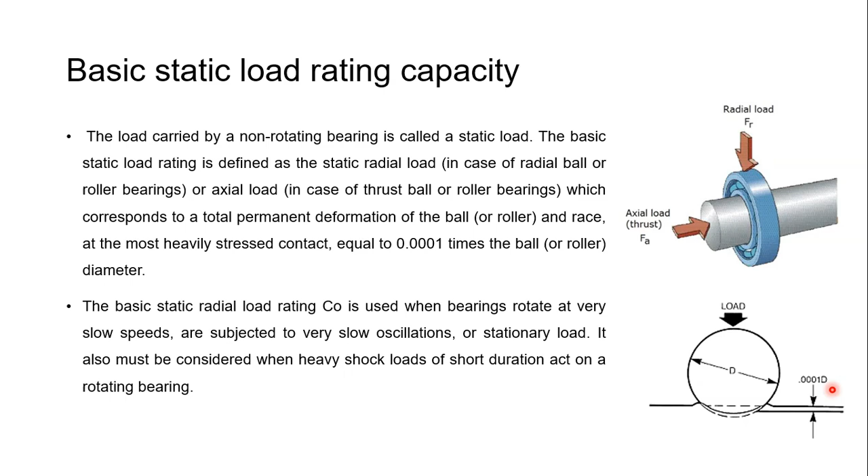So the value of C0, or the equation for basic static load capacity, is derived using Stribeck's equation. So we will derive the equation given by Stribeck.

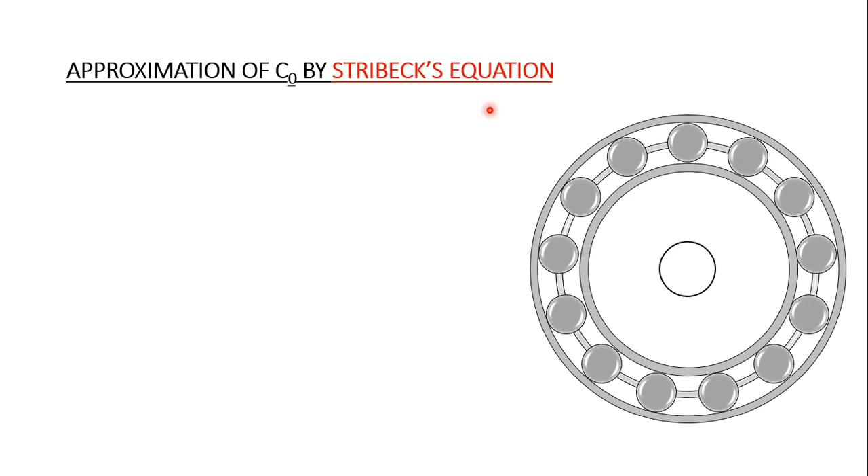So in deriving the equation there are several assumptions. First, the races are rigid and retain their shape.

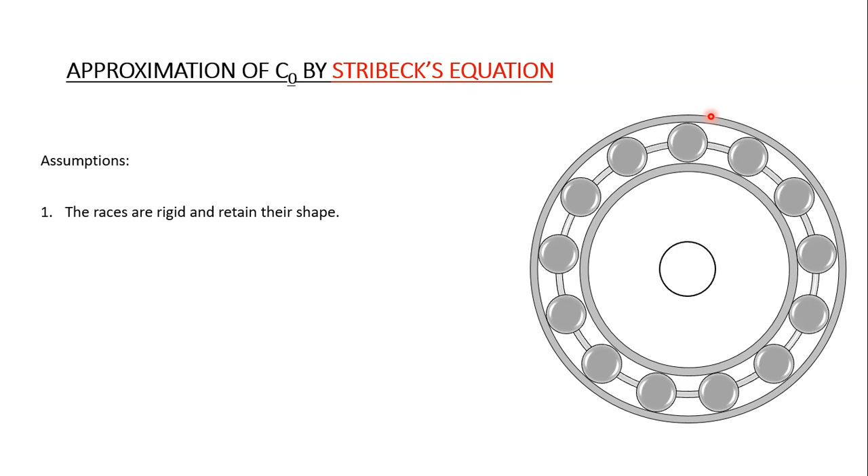This inner race and outer race, they are rigid bodies. Now rigid body means they cannot deform. So the outer race and inner race, they are rigid bodies.

So the remaining element, the balls, they will be deformed, because inner and outer races are rigid.

Next, the balls are evenly spaced around the periphery of the inner race.

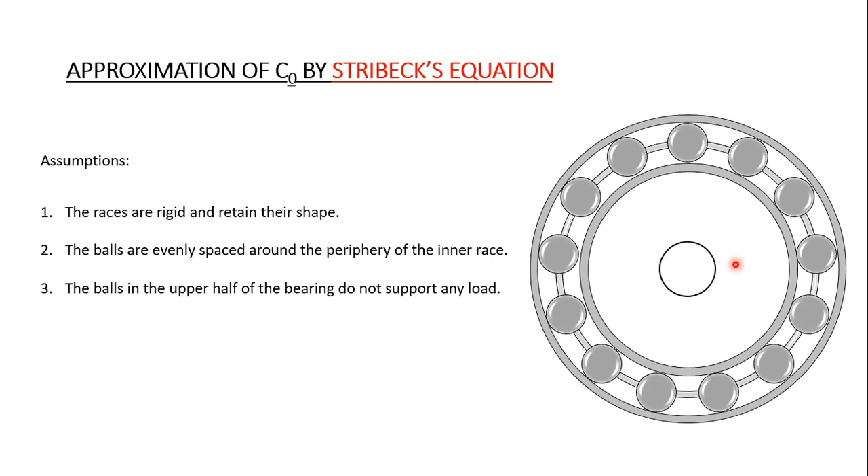Third, the balls in the upper half of the bearing do not support any load. Means the upper half of the bearing, the balls above that half, they do not support any load.

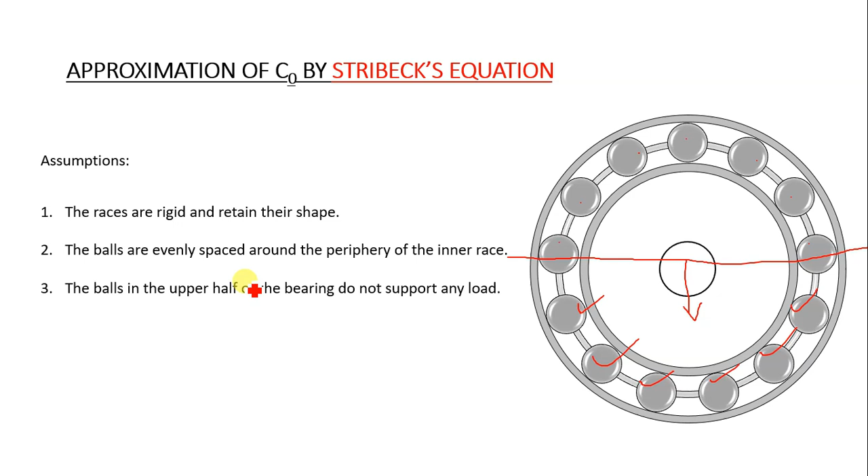So the bearings below the half, below the bearing center, they will support the load. So that is the third assumption.

So let's consider half portion of the bearing, or half of the balls in the bearing. These are the axes passing through the center of this ball and center of the bearing.

All these axes pass from the center of the ball and the center of this bearing, and these balls are evenly spaced, so there will be equal space between all the balls, and they will be distributed with equal angles.

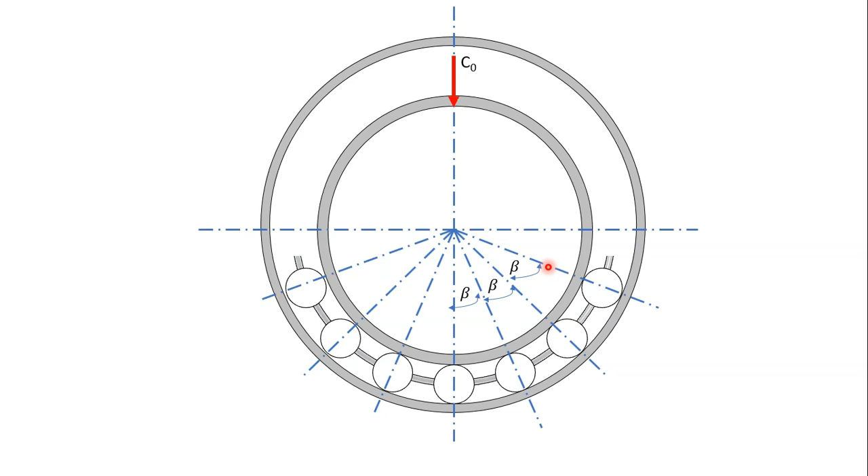C0 is the static load acting on the bearing.

P1, P2, P3, these are the loads acting on each and every ball. So the C0 amount of static load I apply on the bearing, then this ball will support P1 amount of load, this ball will support P2 amount of load, this ball P3, and so on.

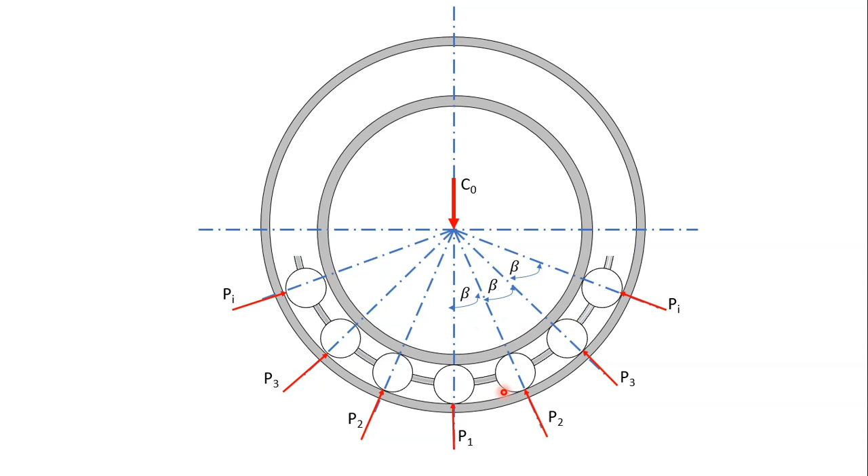So if we want to find C0 from this figure, then what should we do? We'll simply do summation of forces in the vertical direction equal to 0.

So C0 is in the downward direction, so C0 will be equal to P1 plus the vertical component of P2, which we need to consider, that is P2 cos beta.

Now here is also P2, this is P2 cos beta, and the same load P2 is also on the opposite direction, so it will be 2 times.

Plus we need to consider the vertical component of this force P3, so P3 cos of... now which angle should we take?

We will consider 2 beta, beta plus beta, that is 2 beta, because we are considering the vertical component. So the angle between the vertical and the axis of P3 needs to be considered, that is 2 beta. This is again a replica on this side, so it will be multiplied by 2, and so on. So whatever bearings are there, we need to sum up the load each one takes. This is how we will find the value of C0.

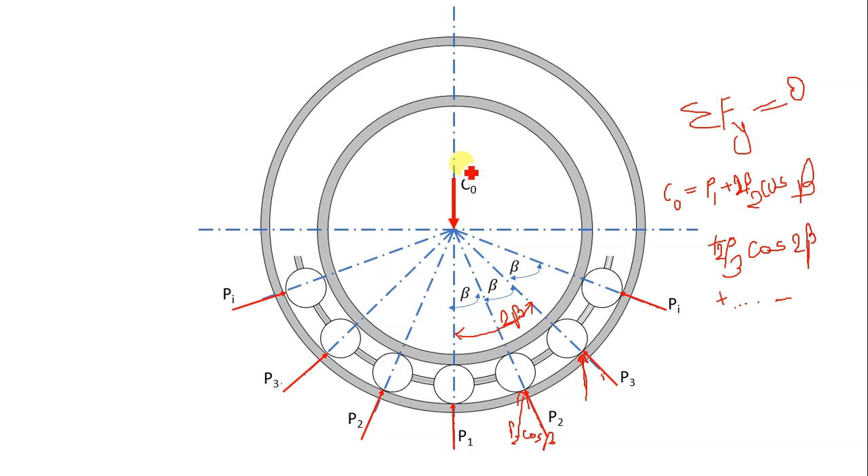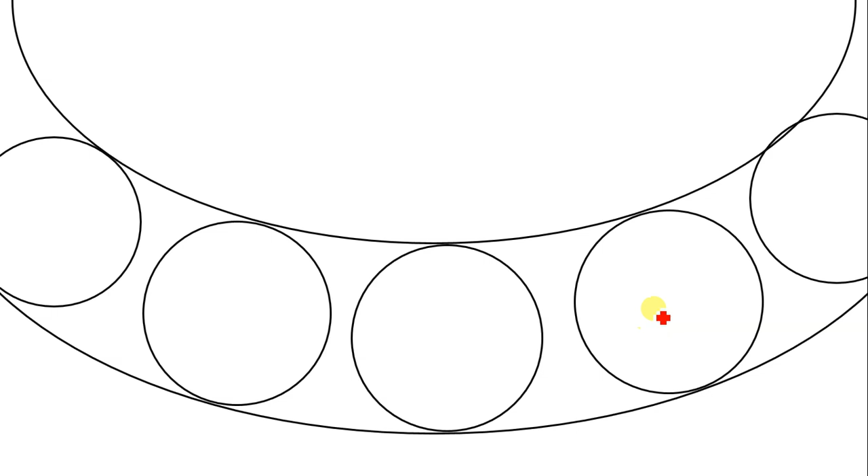For simplicity I have shown the inner race as a simple line because we know it is a rigid body. Now we will consider a zoomed portion of this much amount. If we zoom this portion, it will look like this. This is the inner race, this is the outer race, and these are the balls.

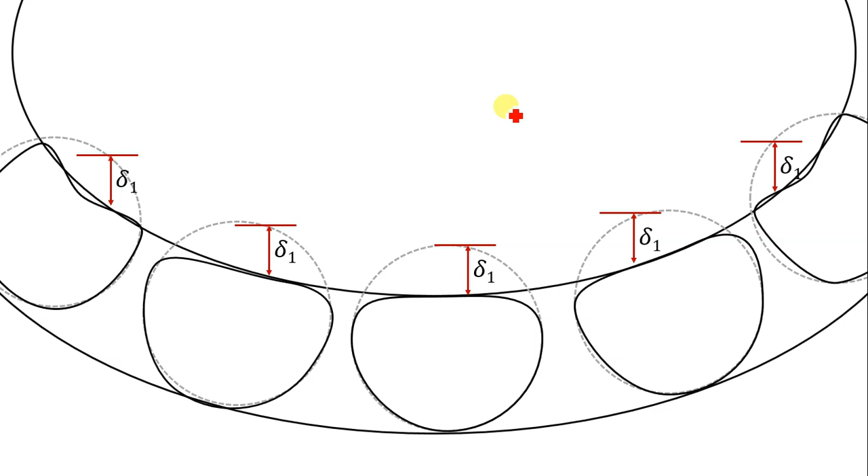We know that when load comes on the inner race, the inner race will be displaced, not deflected, displaced. You can see the inner race is displacing by amount delta 1 in the vertical direction. And we know that this inner race is a rigid body, so whatever points are on the inner race, any point on the inner race will be displaced by the same amount in the vertical direction.

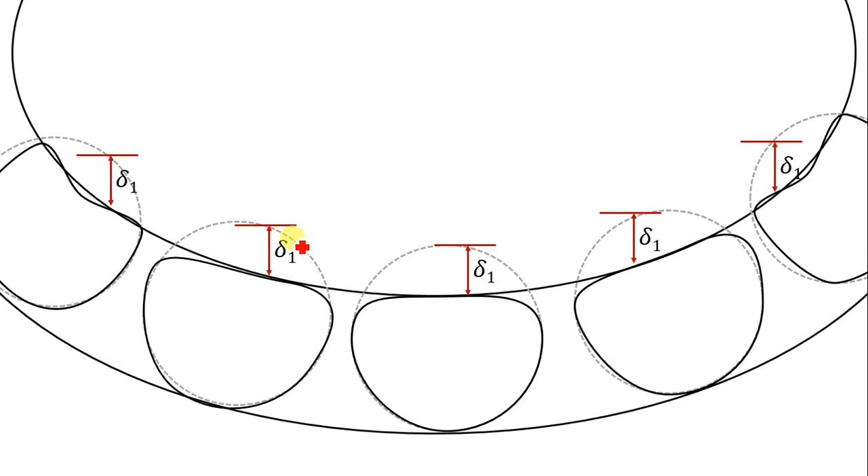If we consider the deflection of balls in the direction of its axis, then for this first ball at the center, what will its deflection be? It will be delta 1 itself, in the direction of its axis.

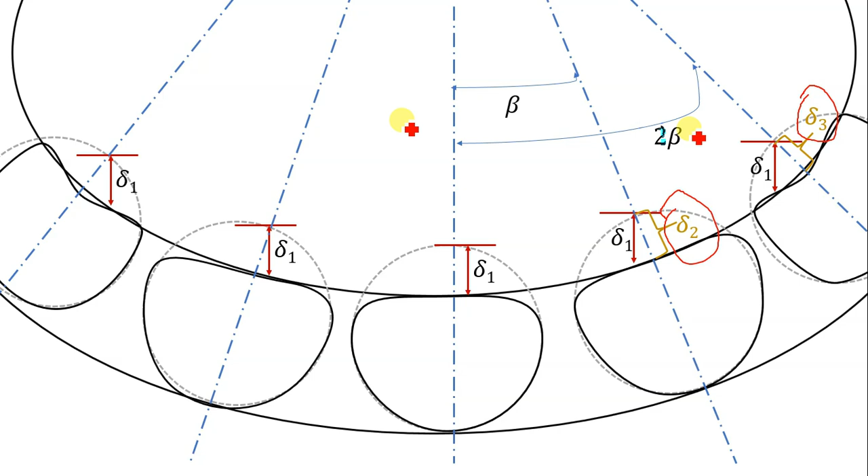So now we will derive the equation by making a relation between these deflections.

So in the presentation we have seen that these balls are deformed by the deflection of the inner race by the amount delta 1. Now as we have assumed that this inner race is a rigid body, all the points on the inner race will be displaced by the same amount in the vertical direction, that is delta 1 for every ball.

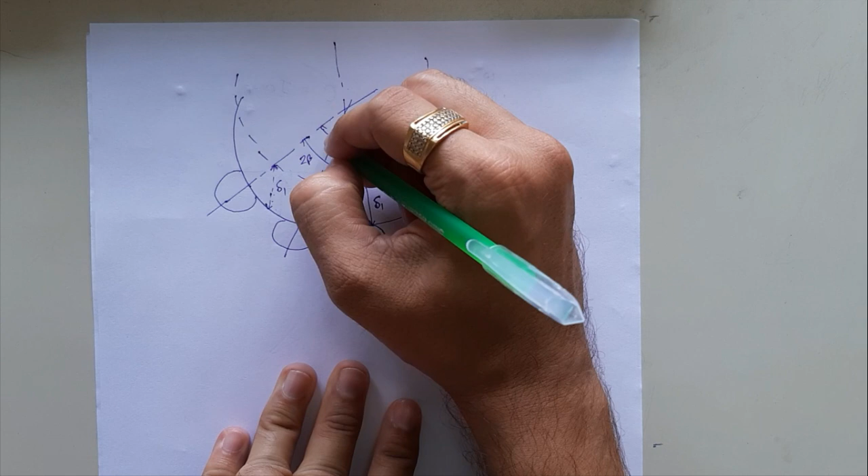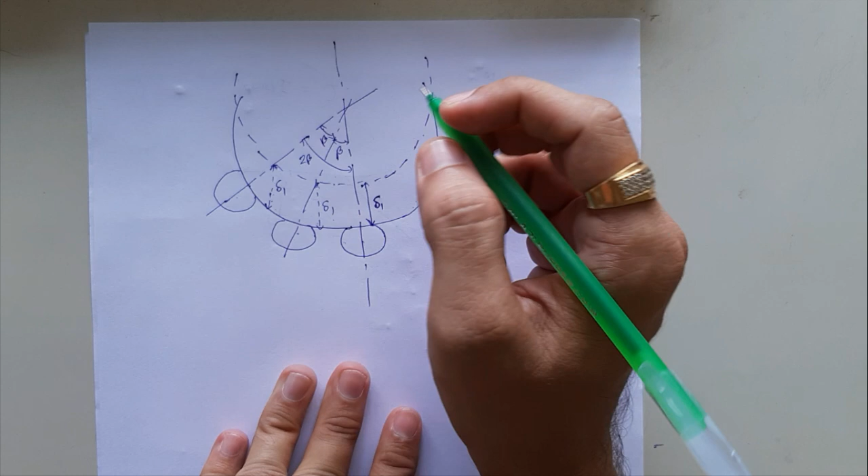This angle between two balls is beta. So the angle between this ball and this ball is beta. The angle between this ball and this ball will be beta plus beta, that is twice beta. Now as all balls move down by the same distance delta 1, and we know the angle between this vertical and the axis of this ball is beta, this is 2 beta, so the actual deformation of this ball will be delta 2, and the actual deformation of this ball in the direction of its axis is delta 3.

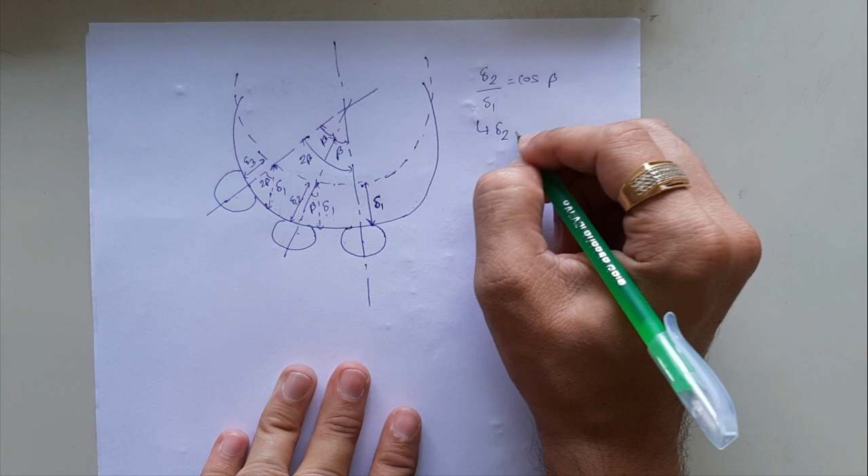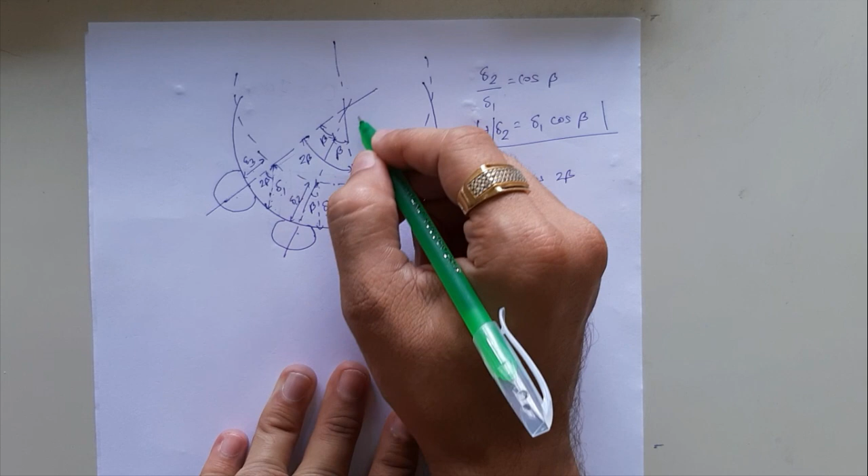If we find the relation between delta 2 and delta 1, then delta 2 by delta 1 is equal to cos beta. So we can write delta 2 is equal to delta 1 times cos beta. Similarly we can write the relation between delta 3 and delta 1: delta 3 by delta 1 is equal to cos 2 beta, because the angle between this vertical and this axis is 2 times beta. This angle of this axis is twice beta, so this angle will be 2 beta. So we can write delta 3 is equal to delta 1 times cos 2 beta.

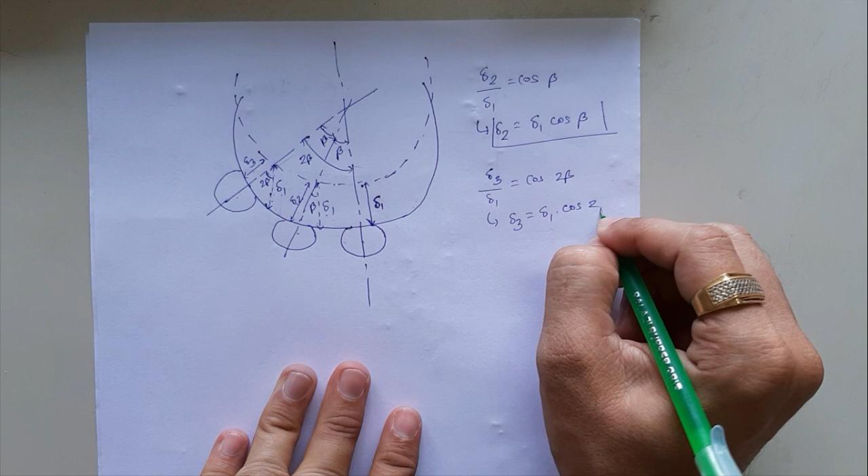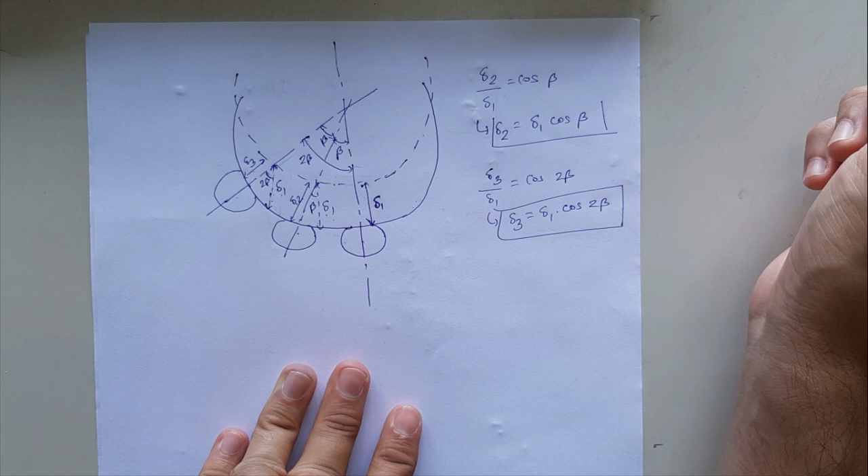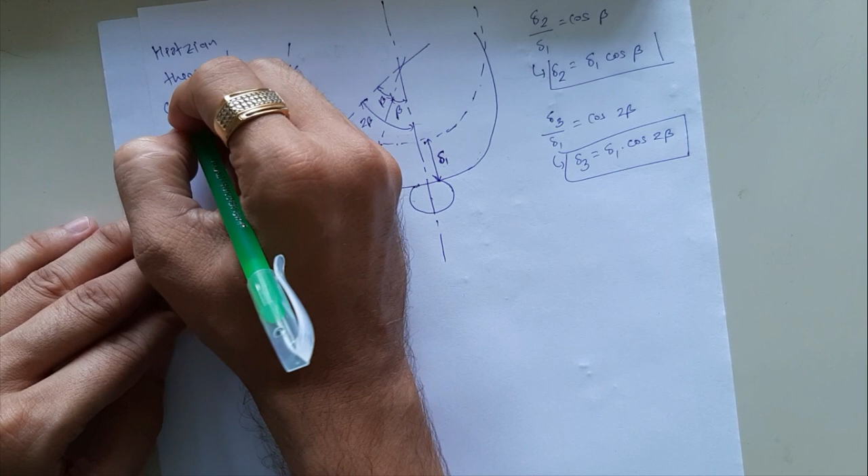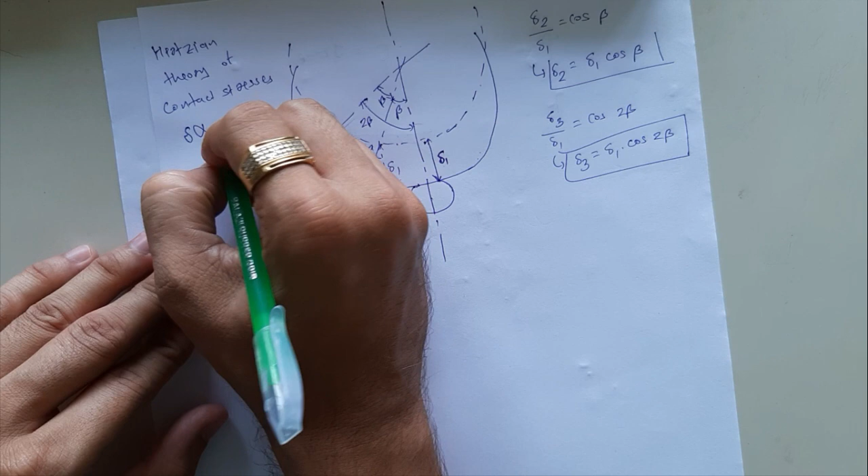Now, as per Hertz contact stress theory, if we find the relation between deflection of the ball and the load acting on that ball, then according to the Hertzian theory of contact stress, we find that deflection of a ball is proportional to P raised to 2 by 3. This P is the load acting on that ball.

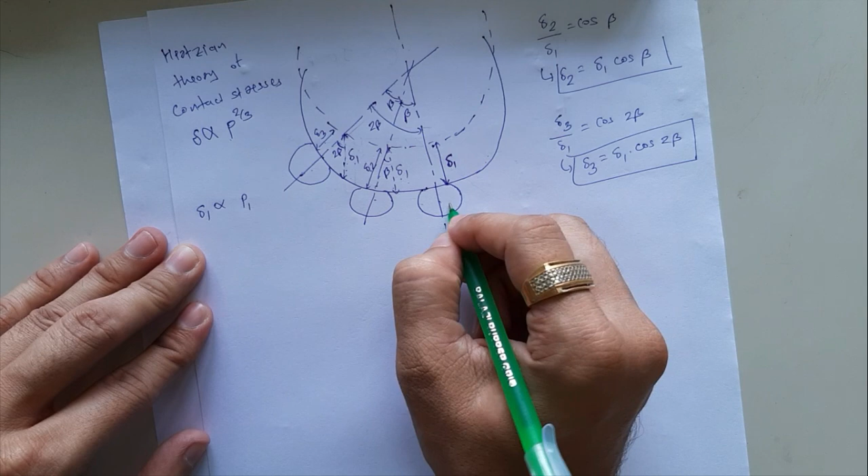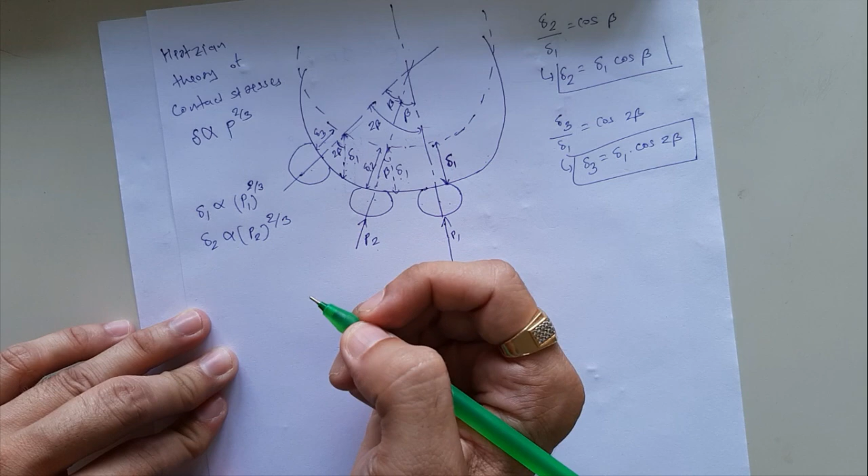So for our case we can write that delta 1 is proportional to the load acting on this first ball, that is P1, so P1 raised to 2 by 3. Delta 2, the deflection of the ball on which the load acting was P2, so delta 2 is proportional to P2 raised to 2 by 3, and similarly delta 3 is proportional to P3 raised to 2 by 3. Here P3 is the load acting.

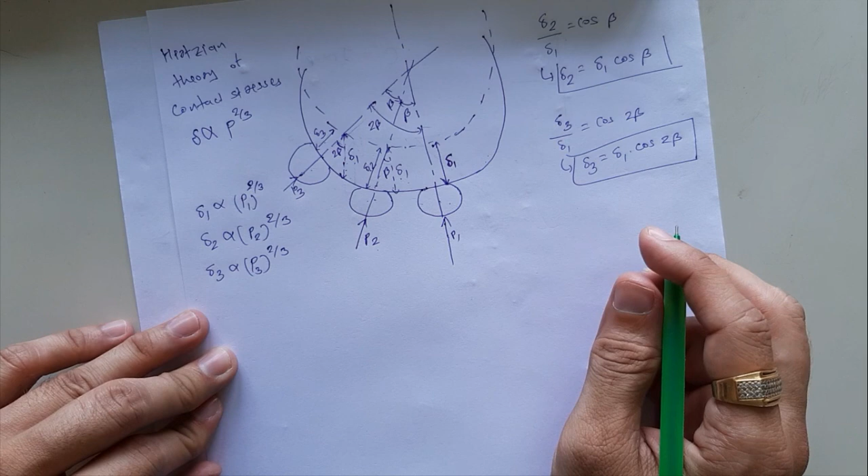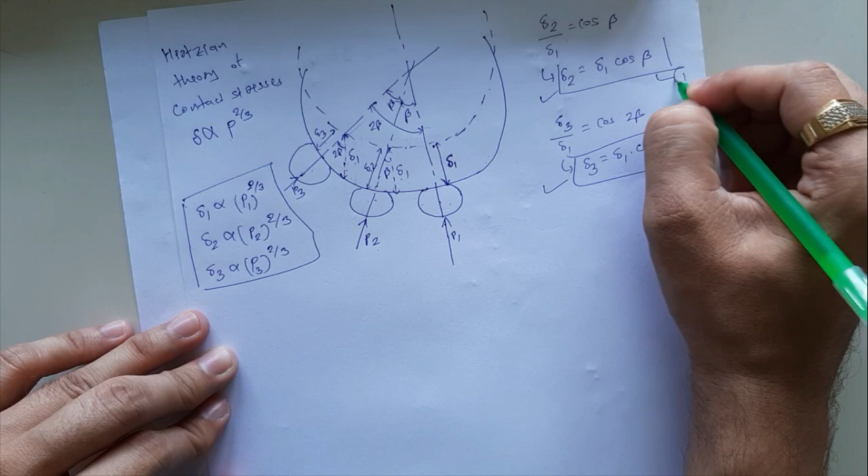Now if we combine these equations with these two equations, let me name these equations 1, 2 and 3. If we combine this equation, we get delta 2 by delta 1 is equal to P2 by P1 raised to 2 by 3, which is equal to cos beta. If we see over here, delta 2 by delta 1 is cos beta. So now if we consider these two terms, we can write that P2 is equal to P1 into cos beta raised to 3 by 2. I'll give this equation number 4.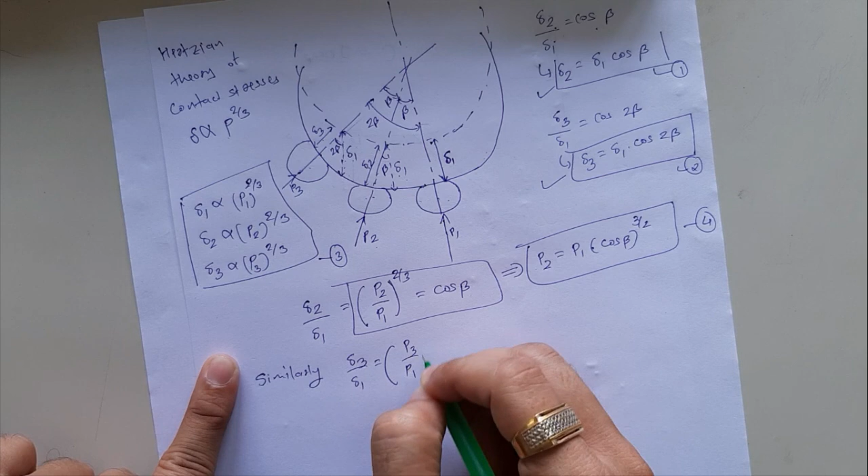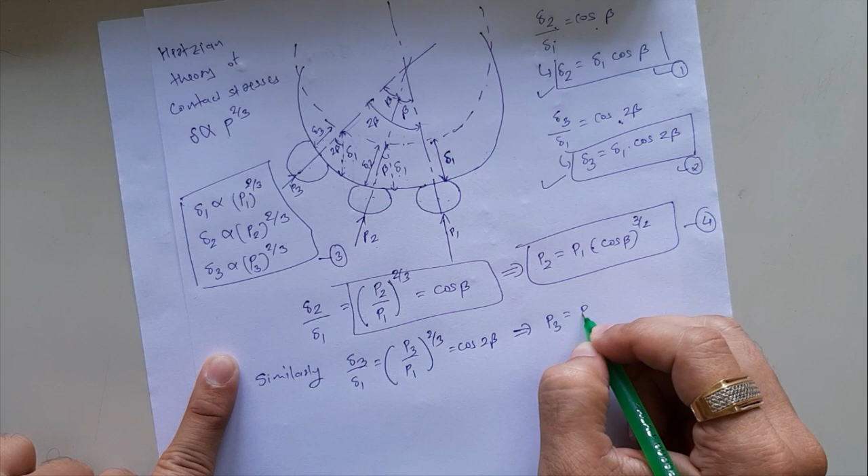Similarly, if we find the relation between delta 3 and delta 1, it comes out that P3 by P1 raised to 2 by 3 is equal to cos 2 beta from this relation. So we can write that P3 is equal to P1 into cos 2 beta raised to 3 by 2. This is equation number 5.

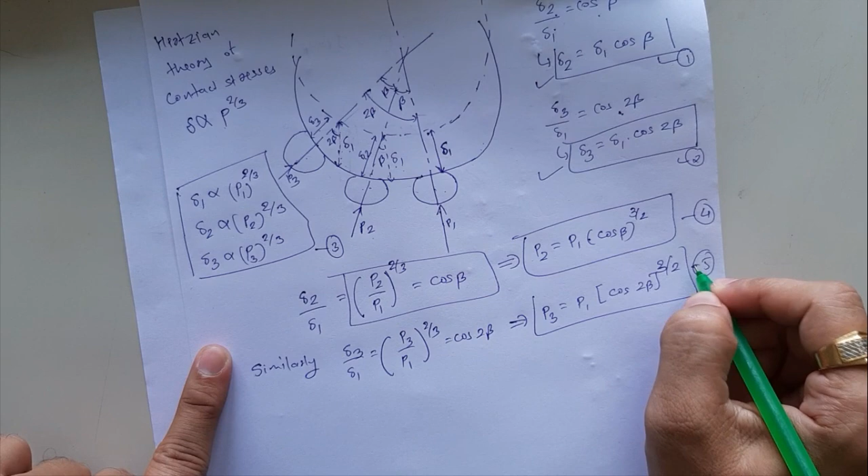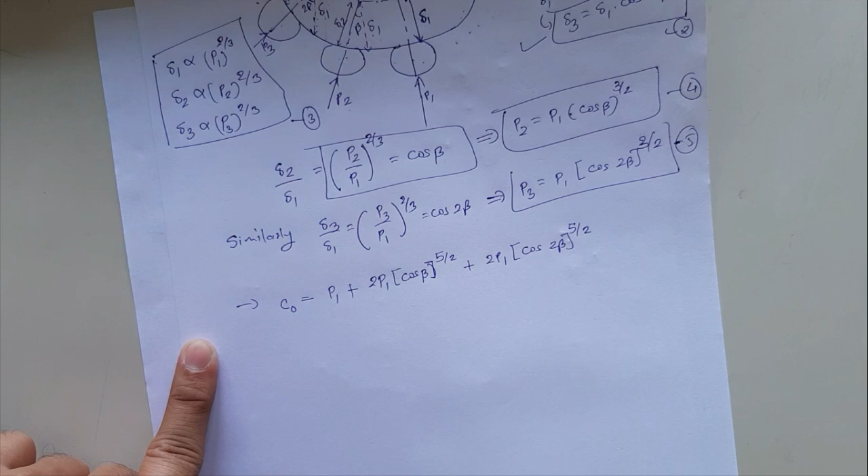If we continue this for the number of balls present, we can write that C0, the static load capacity, is equal to P1 plus 2 times P1 cos beta raised to 5 by 2, plus 2 P1 cos 2 beta raised to 5 by 2, and so on. Taking P1 as common, the inside term is called M. So C0 is equal to P1 into M.

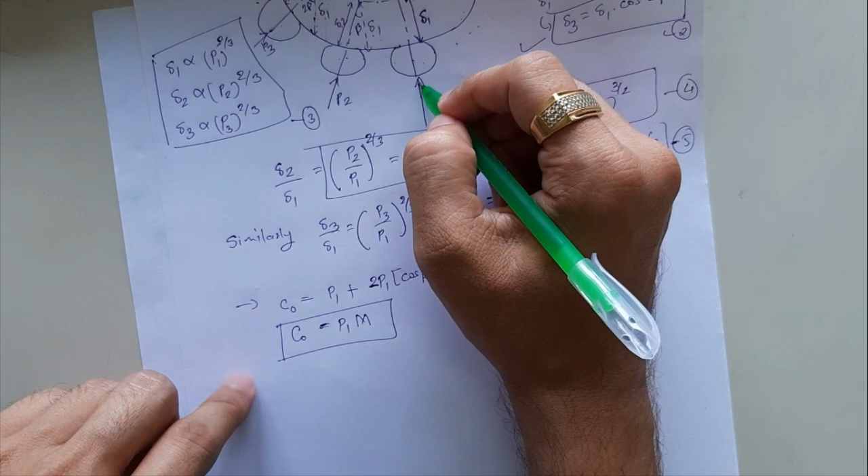Now why have I considered 2 here? Because the balls are symmetric. P1 load is single, then P2 load is present on this side as well as on that side.

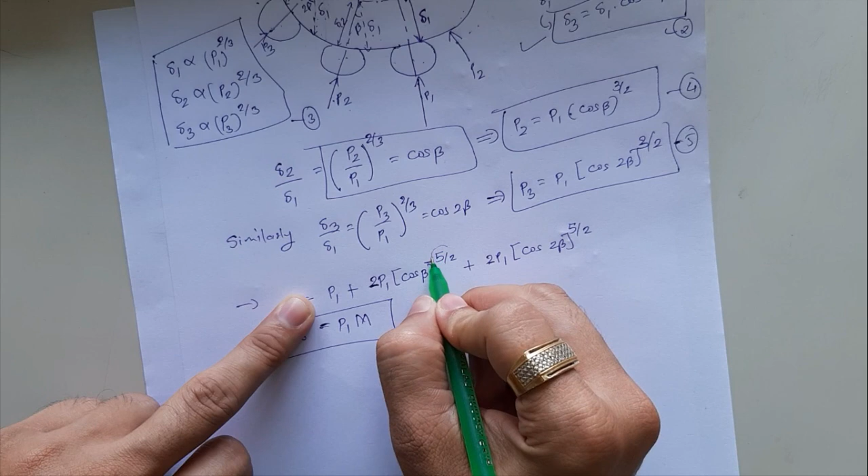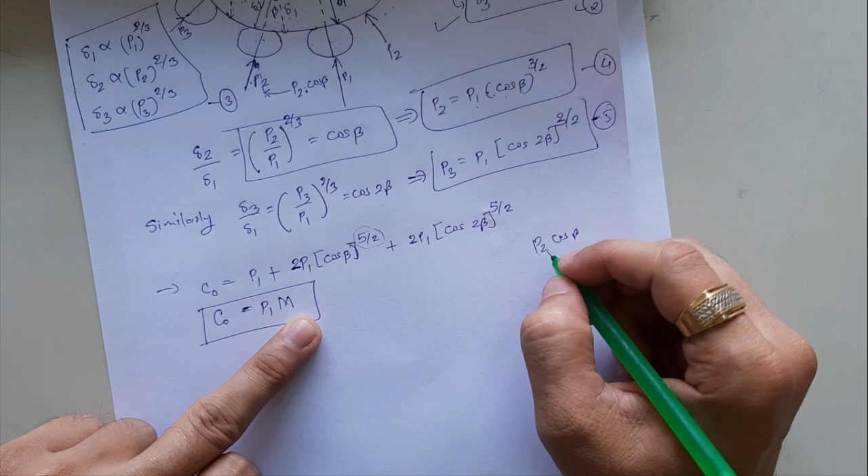Why is it converted into cos beta raised to 5 by 2? If we look here, P2 is in this direction, and we take the vertical component of P2, which is P2 into cos beta. Substituting the value of P2, which is P1 cos beta raised to 3 by 2, multiplied by cos beta, simplifies to cos beta raised to 5 by 2.

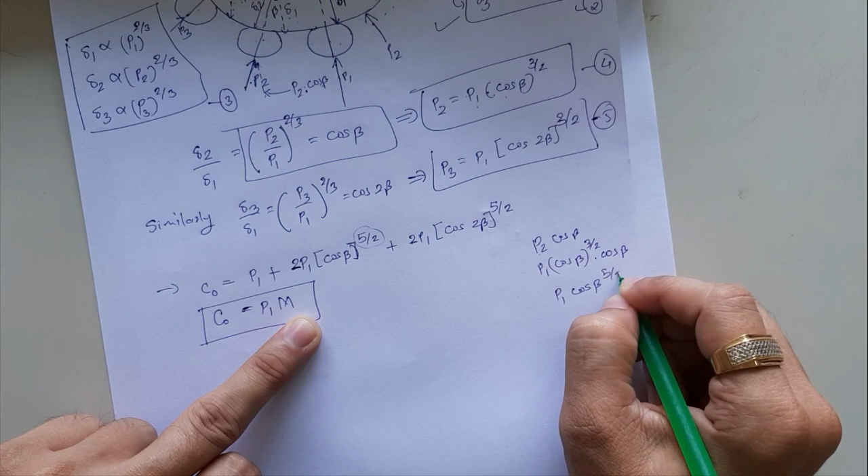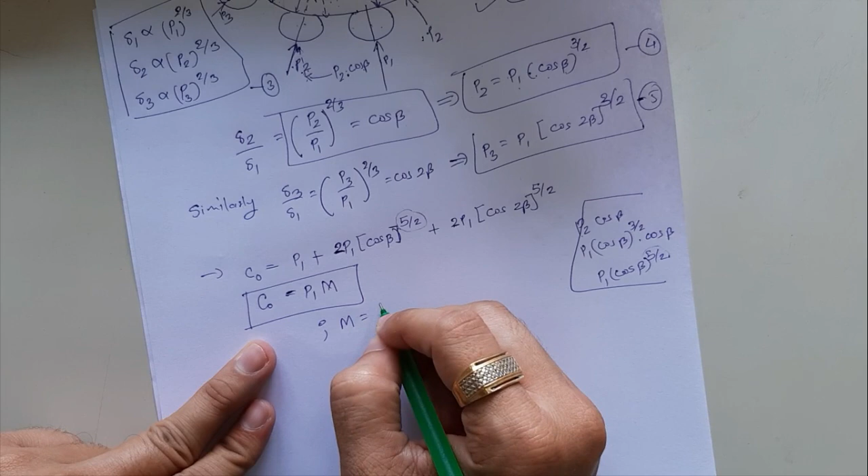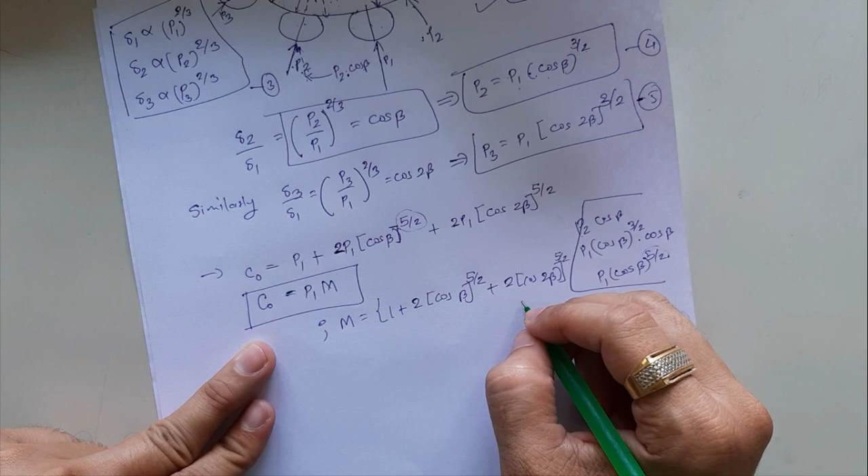Since there are two forces symmetrically placed, we multiply it by 2. This is how cos beta raised to 5 by 2 appears. So we simplify this as C0 equals P1 into M, where M equals 1 plus 2 cos beta raised to 5 by 2 plus 2 cos 2 beta raised to 5 by 2, and so on. This series continues according to the number of balls.

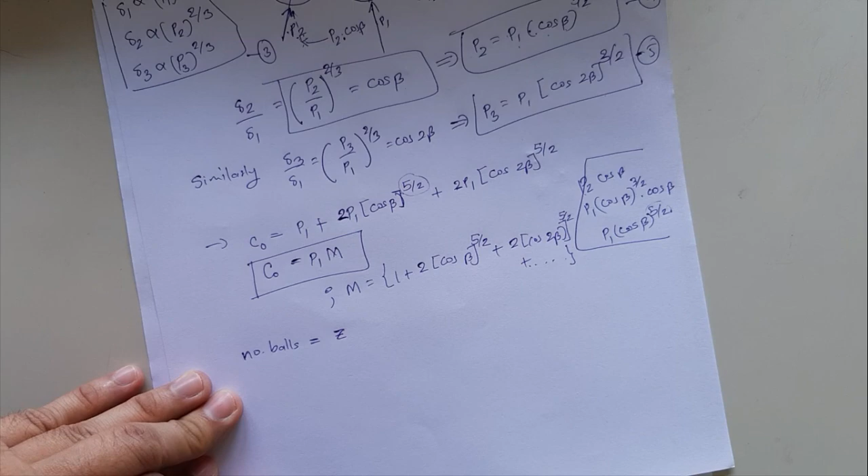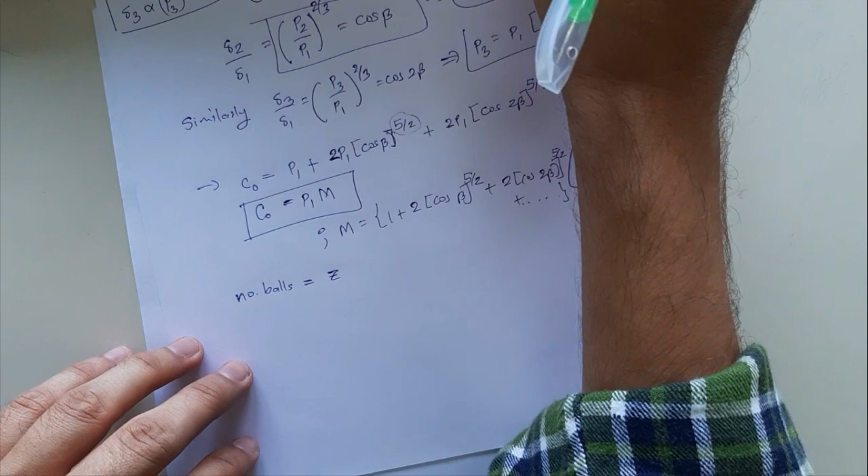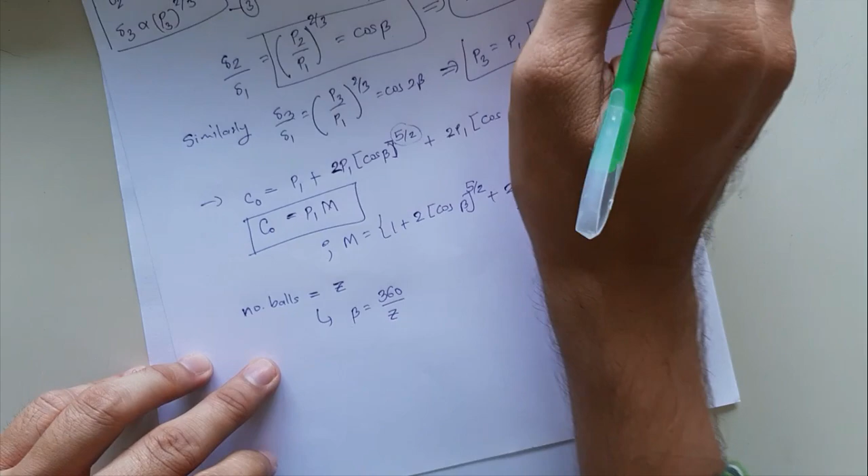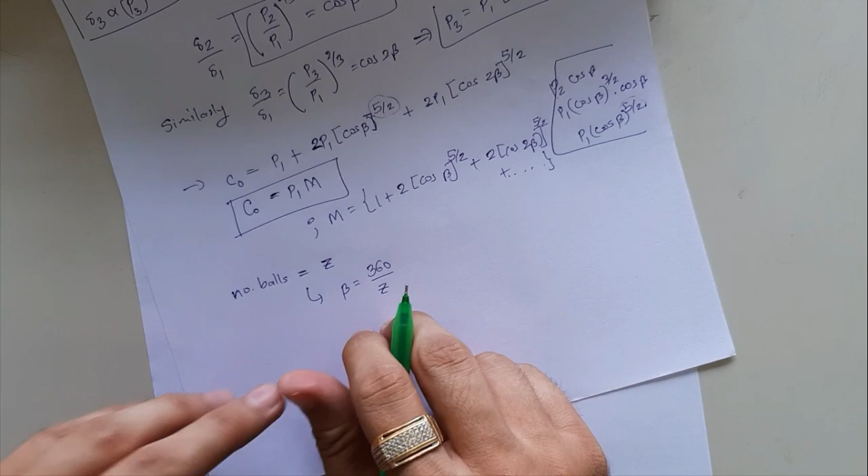Now if we consider Z number of balls in the bearing, then beta will be 360 degrees divided by Z. We divide the 360 degree angle by the number of balls to find the angle between two balls, which is beta. So beta equals 360 divided by Z.

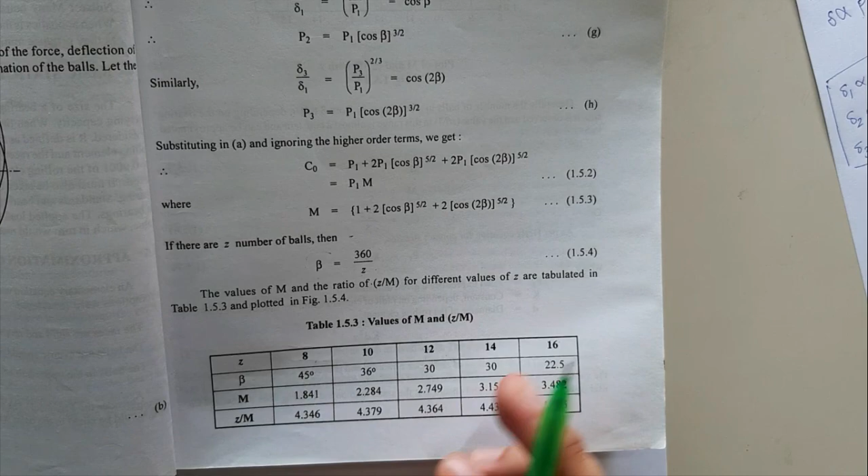Now the value of M and the ratio Z by M is given in a table. Here Z, the number of balls, is 8, 10, 12, 14 and 16. If the number of balls is 8, then 360 divided by 8 gives 45 degrees, so beta equals 45 degrees, meaning the angle between two balls is 45 degrees when there are 8 balls.

If you calculate M by substituting beta equals 45 degrees, you get M equals 1.841 and the ratio Z by M is 4.346. Likewise, you can calculate M and Z by M for 10, 12, 14 and 16 balls. If you look at the value of Z by M, it doesn't change much, just a little.

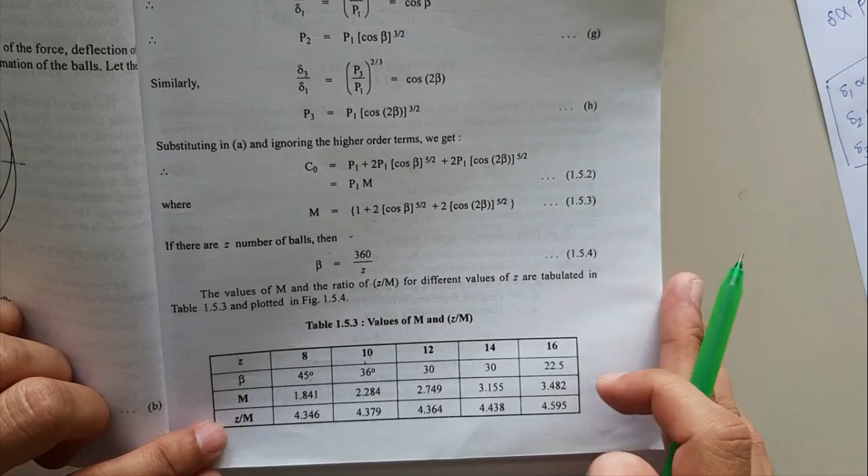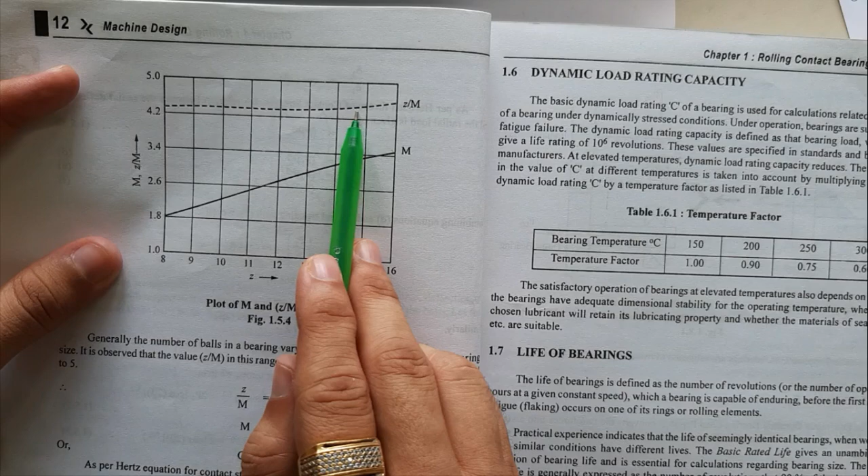If you look at this on a graph of Z versus M and Z by M, the graph of M is increasing, but the Z by M graph doesn't deflect much. You can consider it approximately a straight line.

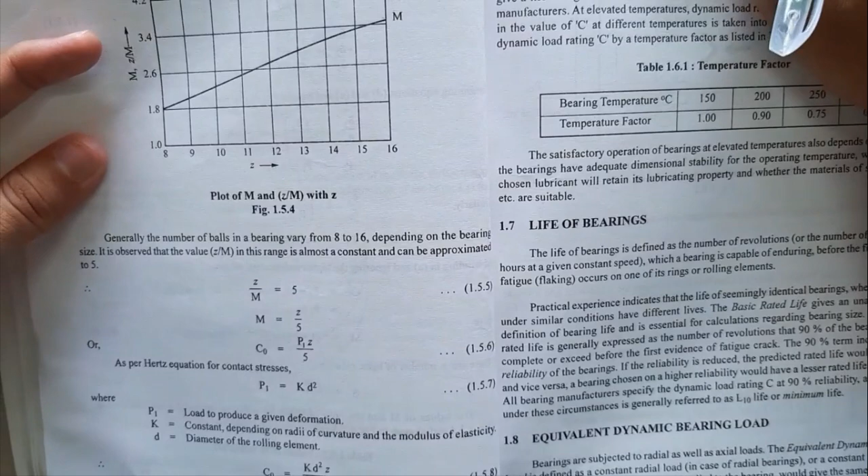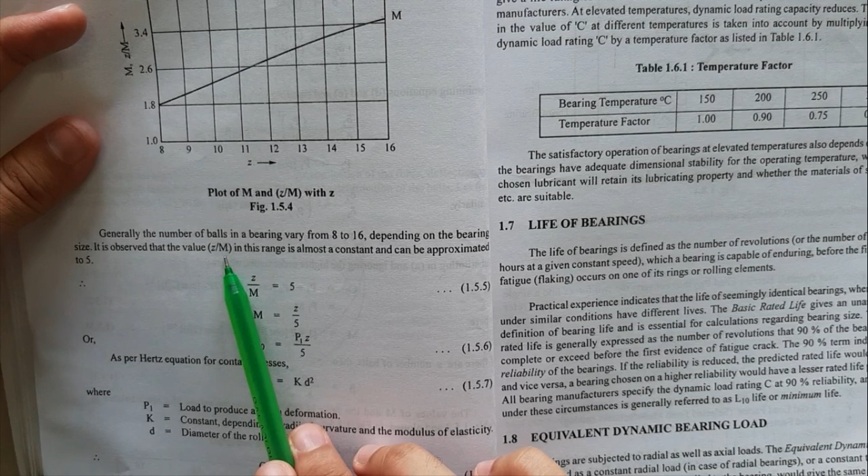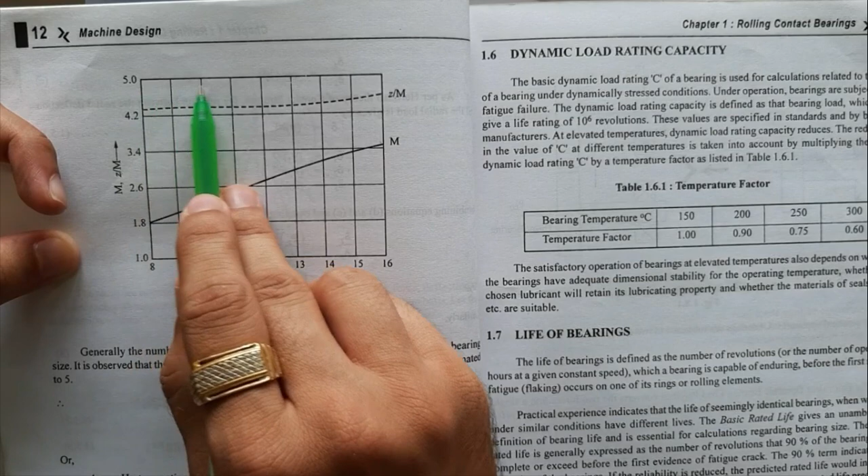Generally the number of balls in the bearing varies from 8 to 16. It is observed that the value of Z by M in this range of 8 to 16 balls is approximately constant and equal to 5. We can assume this approximate value of Z by M equals 5 for the bearing range of 8 to 16.

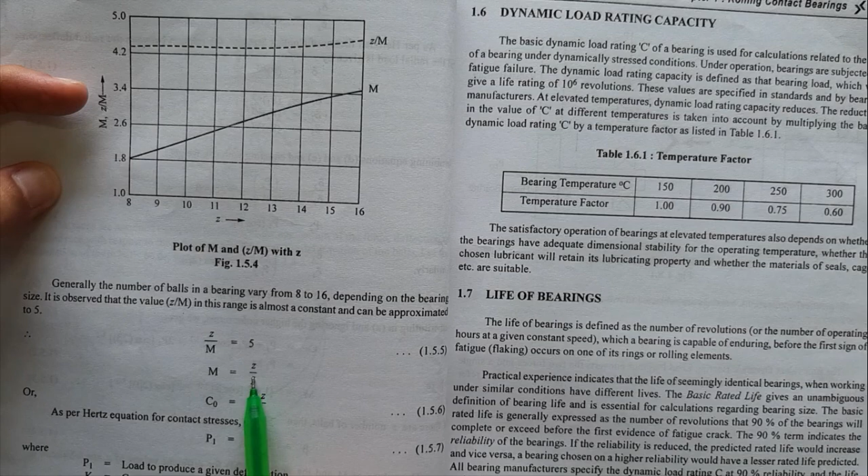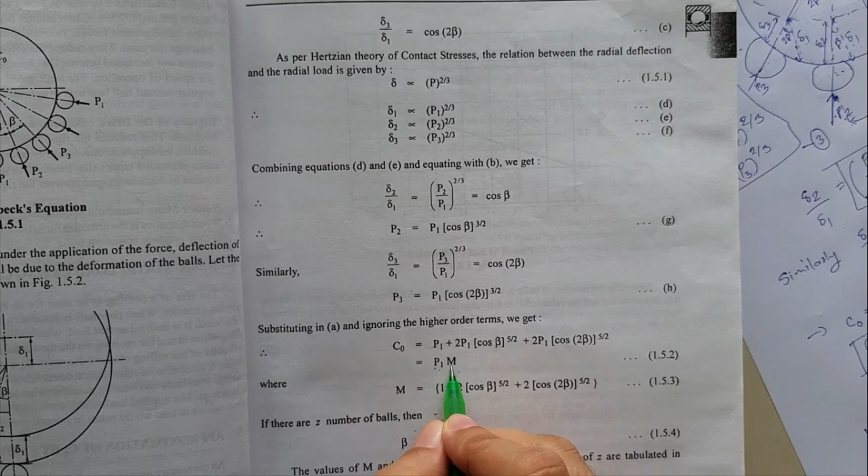So we assume Z by M equals 5, and from this M equals Z by 5. Now substituting this value of M, since the basic static load carrying capacity C0 equals P1 into M, substituting M equals Z by 5 gives C0 equals P1 into Z divided by 5.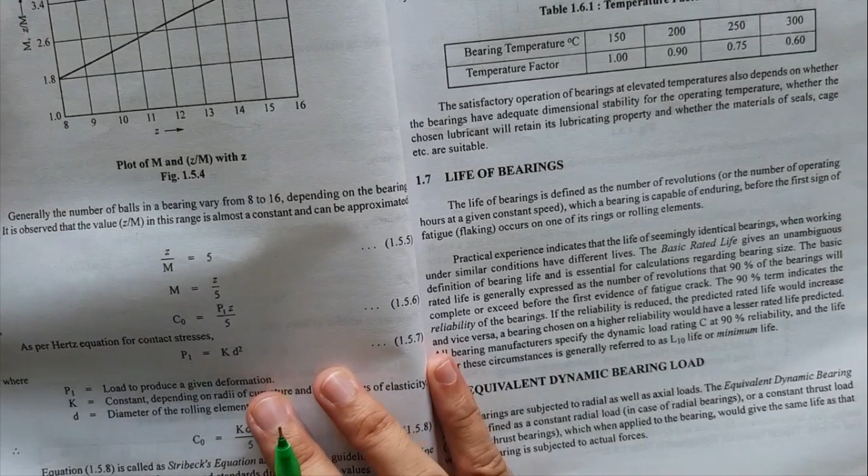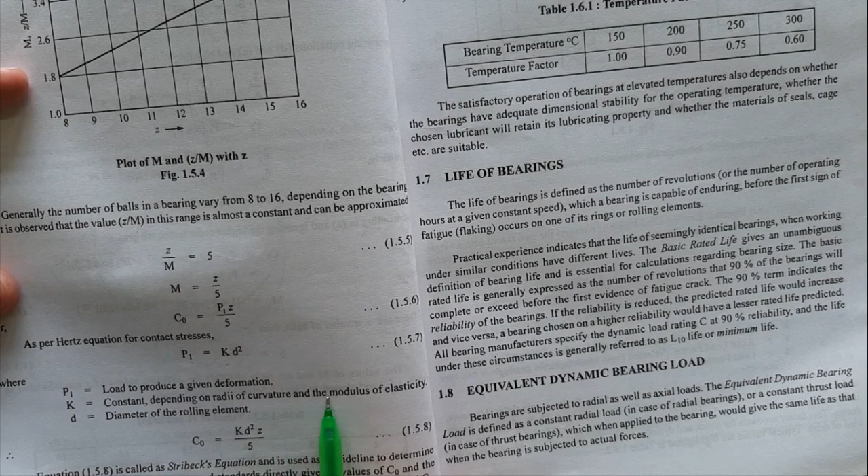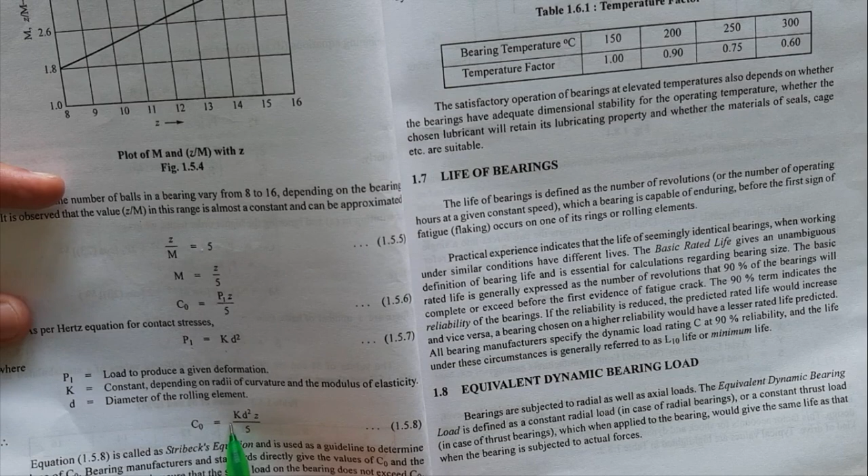Now according to Hertz contact stress theory, the relation between P, the load acting on the rolling element or ball of the bearing, is P1 equals K into D square, where D is the diameter of the ball. K is a constant which depends on the radius of curvature and the modulus of elasticity of the ball. Substituting the value of P1 in the equation, we get C0 equals K into D square into Z by 5. This equation is called Stribeck's equation. This is how this relation comes out.